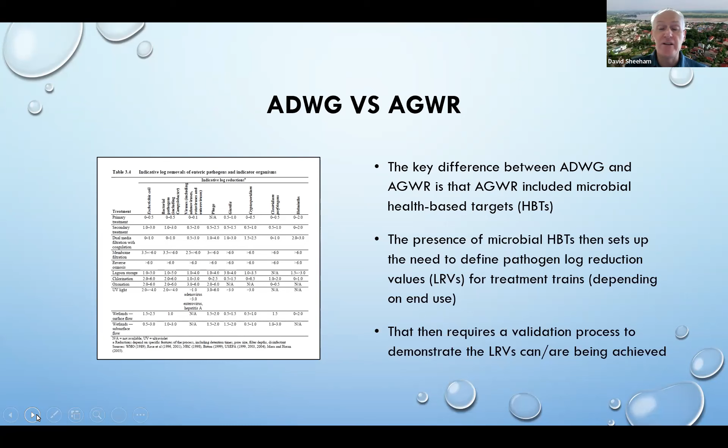And the table on the left-hand side of the screen is taken from the 2006 version of AGWR, and that's one of the tables that's in the process of being updated for current information that's come to light since that point in time. And Chiew, in a later presentation, will give you a great practical example of how you go and apply these guidelines to a real-world scheme.

So as mentioned previously, there is a range of state-based guidance material. This one here shown on the left of the screen is the Victorian Guidelines for Water Recycling. The updated version was released last year.

Unfortunately, each state and territory has a slightly different set of these guidelines and associated regulatory frameworks. And I guess if you're looking at it from a scheme proponent's perspective or a manufacturer of technology, this can lead to certain levels of inefficiency, as validation requirements may also vary from state to state, which means you may have to go through multiple validation processes.

In 2007, we had a change of federal government, and obviously the millennium drought was still going on at that point in time. So at that stage, the Labor Commonwealth government funded a number of water-related centres of excellence. The one relevant to today's discussion was the Australian Water Recycling Centre of Excellence, or the AWRCoE, and that was funded to look at all aspects of water recycling, and that ran from 2009 to 2016. Because it started in 2009, obviously the millennium drought broke in 2010-11, which I guess took a little bit of heat out of the recycled water industry.

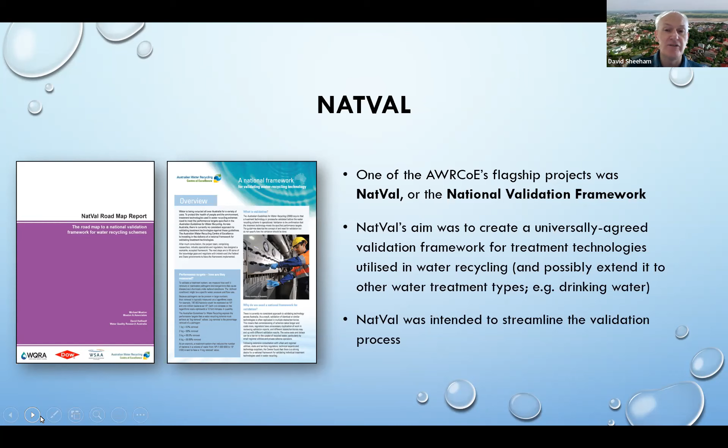But anyway, having said that, one of the flagship programs of the Centre of Excellence was NatVal, or a National Validation Framework. And NatVal's main aim was to create a universally agreed validation framework for treatment technologies utilised in water recycling, and then possibly by extension other water treatment types, including those used in drinking water. And the idea was that if you had that unified, universally agreed framework, that would streamline the validation process across Australia, because really, if you're running a UV system in Queensland, it probably hasn't got a lot of difference if you're running it in Western Australia, for example.

When the Centre of Excellence finished up in 2016, unfortunately, NatVal wasn't quite completed at that point in time. NatVal IP was transferred to an entity known as WaterSecure, and NatVal became what a lot of people would know now as WaterVal.

WaterSecure, in its tenure, managed to finish and publish a number of validation protocols, but for a range of reasons, WaterSecure was wound up in 2018, and the WaterVal IP transferred to WaterRA, and Jacqueline will be covering this in a lot more detail in her presentation. And that's where I'm going to stop, Mark, because I guess a lot of the other presentations will dovetail into that fairly brief introduction to the topic of validation.

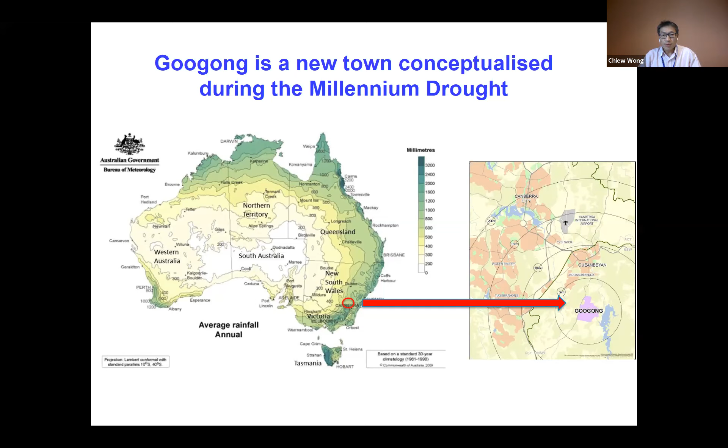Because it's a new town and it was conceived in the millennium drought, water security or resiliency is a very important part of the planning approval. The next slide, I'll talk about the project timeline. The whole project approval was submitted during the millennium drought, in the 2000s, and the planning approval was granted in 2010. There's a couple of timelines; I put it at the high level, just on the yearly level.

Once the project approval was granted, the developer for the parcel of land went about trying to implement the whole project. A key part of the project is to have a water recycling plant that will recycle the wastewater collected in the township, treat it, and then resupply it via a purple pipe around the whole neighborhood. A key part of the strategy is to select a pre-validated membrane supplier or technology supplier as part of the water recycling plant construction. So in 2013, competitive tenders were sent out to select the MBR membrane and the UV technology that will form a key part of the validation for the recycled water scheme. In parallel, the construction contract was tendered, and in late 2013, the whole contract was awarded.

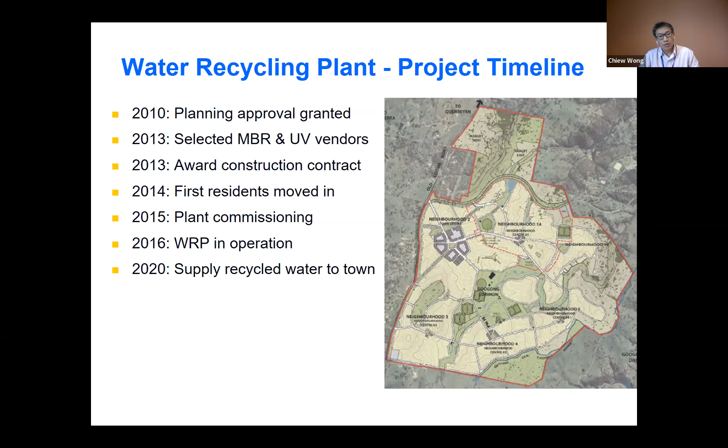Very quickly in 2014, first residents moved into the town. Unfortunately, we can't really commission the plant until there's a certain amount of population. Construction of the plant was completed in 2015, and commissioning was also completed in late 2015. We went through a very extensive 6 month process verification or proving period. So in the middle of 2016, the whole plant went into operation. But it took another 4 years for recycled water to be supplied to the town. There's a number of reasons for that, not necessarily related to validation, but it is a long process that took quite a period of time to implement.

As I mentioned before, Googong is a dual reticulation township. Recycled water is supplied in a purple pipe to each household. I think David mentioned the AGWR. If you go through the AGWR, the pathogen log reduction requirements for a dual reticulation scheme are summarized here: for virus, 6.5 log; protozoa about 5.5 log; bacteria about 5.2 log. For Googong, we employ a multi-barrier approach to achieve these log reduction targets, a combination of MBR, UV, and chlorine to achieve a total log reduction well exceeding the required log reduction.

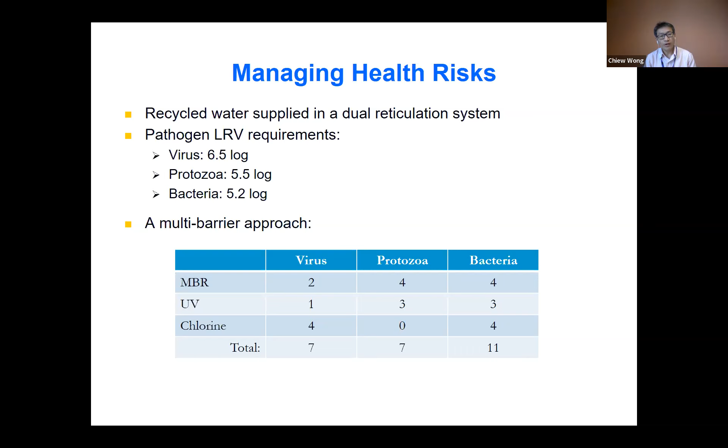Going through each barrier, for MBR we are targeting 2 log, with UV supplying a further 1 log reduction. The chlorine disinfection system was designed to achieve a 4 log reduction of virus. Now, using that similar technology, you find the protozoa and bacteria log reductions will be about 7 and 11, which well exceed the 5.5 or 5.2 logs required for the scheme.

Okay, so as I mentioned before, for the validation approach, we've taken the approach of trying to employ validated products, and the whole idea is we're trying to have validated products that also have online indicators that could continuously monitor the effectiveness of the barrier. A key thing to consider here is really the procurement approach. We know the whole thing will be constructed by a civil contractor, but the key thing is that we want to own the control of the validated technology that will be implemented for the project.

So like I mentioned before, the MBR membrane package was competitively selected, and we evaluated the validation status for the membrane in order to reach the selection. Same for the UV reactor, we evaluated the validation status for the reactor, and then selected the technology before nominating the product to the main contractor for the project. It's worth also noting that we also put in a backup barrier.

As part of the design, we have a tertiary filtration membrane to achieve tertiary phosphorus removal, and that was designed to be a backup barrier because around 2012, 2013, there were some doubts about whether MBR can be considered as a validated technology for water recycling. So we deliberately considered having another membrane just as a backup barrier.

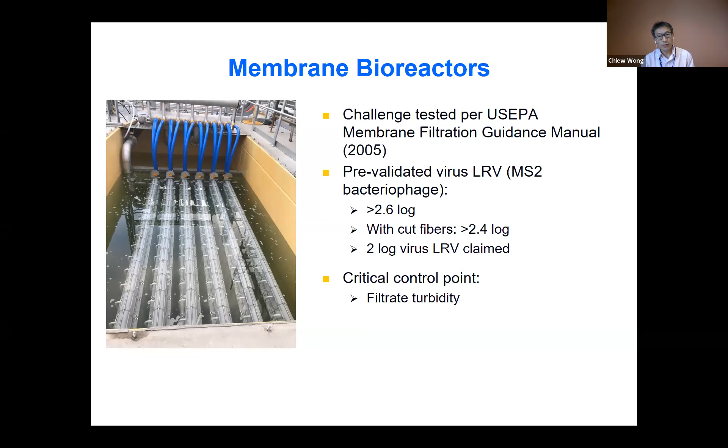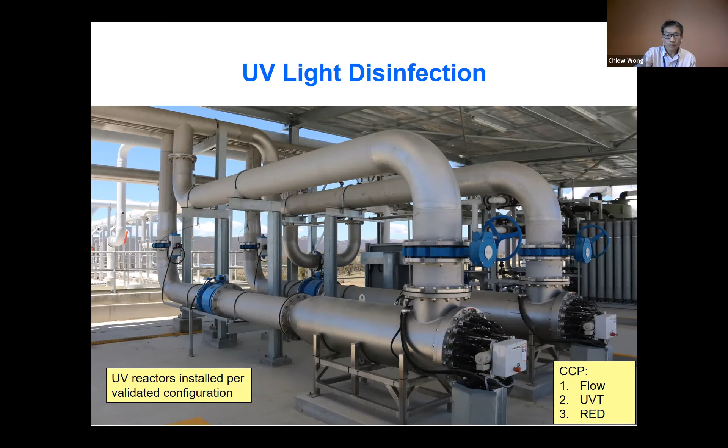So the critical control point for this chlorine disinfection system is trying to achieve a CT value of 16 milligram per minutes per liters, under the condition that the water temperature will be above 10 degrees and the pH is less than 8. Okay. Now, in order to validate the design, a key part of it is to conduct tracer studies.

So the tracer study was conducted by Yabbie Pond. I think Zelko is here today as part of the meeting.

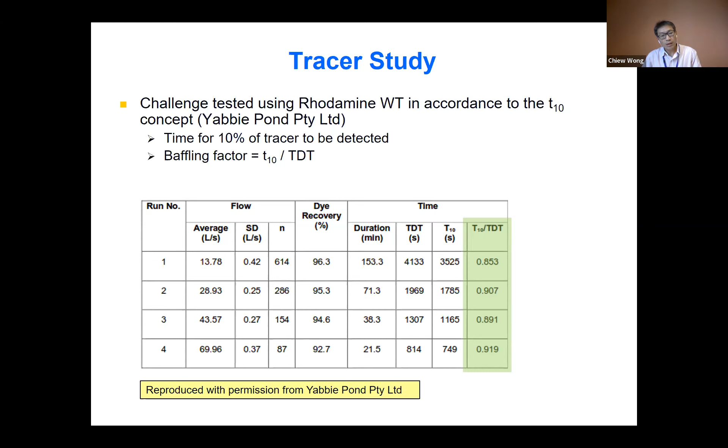And the last column there, which is shaded in green, shows you the efficiency factor that we can achieve with this chlorine contact pipe design. So the numbers range between 85% all the way to about 92%. The next slide. I'll show you a typical response coming out from the tracer studies.

So if you plot it and then estimate the time it takes for 10% of the tracers to come out, in this particular case, you get an efficiency factor of about 0.89. Okay, so all these numbers would then be employed to calculate the CT value in the SCADA program and then form the CCP for the project.

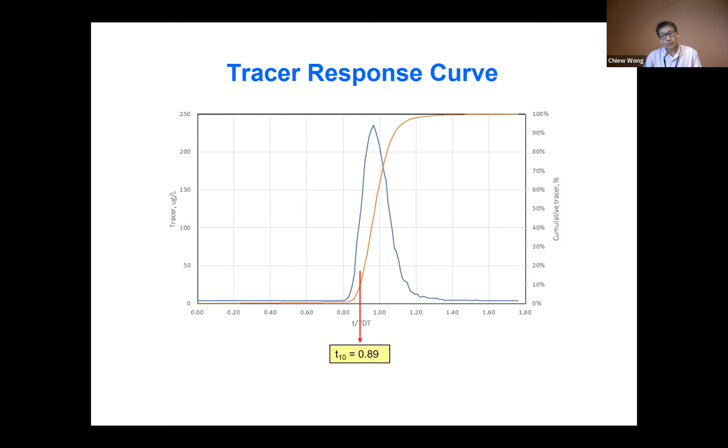So on top of all this validation study, the project also conducted verification testing, and this was conducted during the commissioning and the process proving phase. And this was done in consultation with Office of Water at the time, and it measured a number of indicator organisms at different parts of the process.

So for the MBR, we measure the MBR filtrate, and for the UV, we measure the water after the UV reactor, and then finally for the chlorination system, the recycled water that we measure will demonstrate the level of indicator organisms in the water. So a number of indicator organisms were selected. So for virus it's somatic coliphage, protozoa is Clostridium perfringens, and bacteria is fecal and total coliform.

And basically based on the verification testing, we were not able to detect any of the indicator species in pretty much all the samples. And with that verification testing together with the validation that was conducted, the scheme passed its validation requirement for the project.

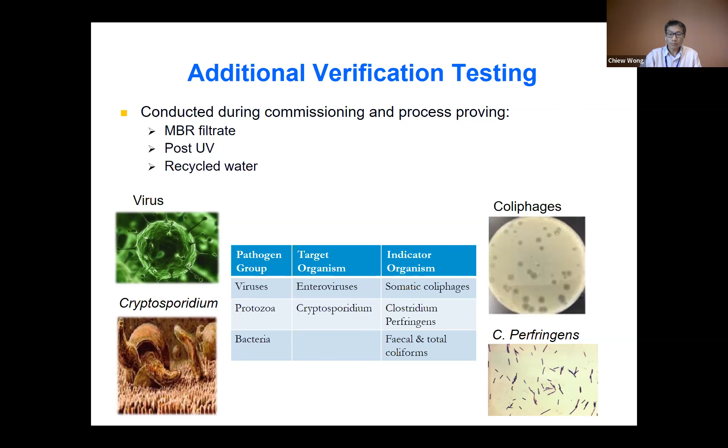So the validation journey was also conducted together with other parts of the recycled water management plan, including a public education program across the town. And also there were a number of cross-connection checks conducted for the households, leading to the recycled water being approved to be supplied to the town in the year 2020.

Now, in terms of outcome, I think what this project demonstrates is that if you can conduct the validations properly for a project like this, it could really improve the resiliency and the livelihood of a new town, which is located inland. Usually for all these inland towns, desalination is really no option. And recycling is a key part of trying to improve the water security and the water resiliency of the town.

So today, Googong is home to about 2,500 people, and ultimately it will be home to some 6,000 people in the next couple of years, up to 10 years.

That's all I have for the presentation. Thank you.

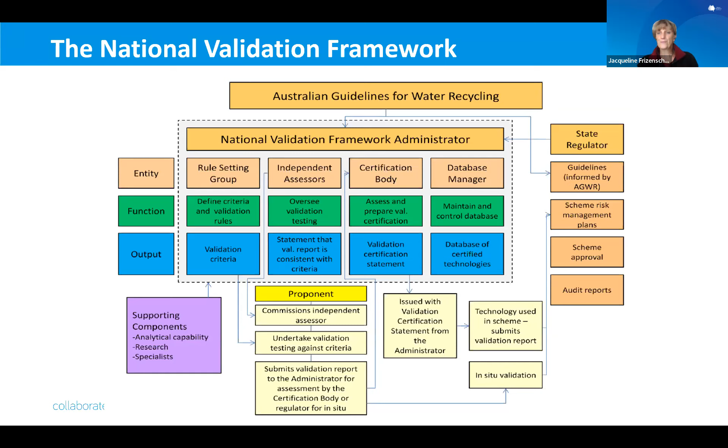So through those workshops and through quite a bit of work, and that was led by Marty Hancock in particular, there has been a new proposed WaterVal option put on the table, which has been endorsed by the regulators and the industry members. And it's a simplified scheme. It still has most of the components of the original scheme embedded.

However, there is now a WaterVal administrator who can coordinate all these groups, but there are now independent assessors and consultants, and the scheme proponents commission consultants to undertake these roles internally and undergo the testing and the validation according to those protocols that are submitted. So it is a bit at arm's length from the national framework, and it is allowing the states to apply some of these protocols as they wish, but there will be standard protocols developed, and the WaterVal administrator will have the oversight of how to do that.

So what does the WaterVal administrator do? His or her role would be to coordinate the rule setting group and the development of the protocols and research, manage the website and resources, and provide training. So it is, in the true sense of the word, an administrator. However, it is also a role that can instigate new research and the identification of which new protocols need to be developed.

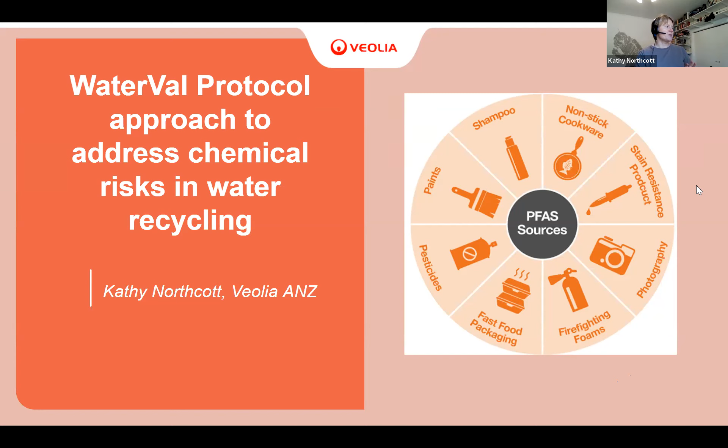I also want to mention that the validation study I'll talk about in my presentation was done by a PhD student at the University of Melbourne, Hong Xiaopeng, who was supervised by Professor Peter Scales. Okay, so we're going to talk about a WaterVal protocol approach to address chemical risks in water recycling. We'll start off with what keeps us awake at night with regards to chemicals of emerging concern. We know that both pathogens and chemicals are critical risks to water quality, public health, and the environment. We know that different classes of pathogens and chemicals can be monitored by routine sampling and analysis, but that is costly and it takes time.

Luckily, we have things like WaterVal and the health-based targets for drinking and recycled water that allow us to categorize pathogen risks into a small number of categories, and then we can place appropriate risk mitigation measures against those particular pathogen categories. You compare that to chemicals, where there's over 85,000 chemicals listed in common use. We only routinely measure about 1,500 typically, and there's tens of millions of chemicals that are currently registered and characterized in less common use, but there's more chemicals being registered every day.

Our typical approach is a multi-barrier treatment system that we can use to reliably remove contaminants, but the challenge for treatment barrier selection is the ability to directly and continuously measure the level of contaminant removal. So for pathogen risks, for many years, I think all of us know and love the critical control point approach. And that's where a treatment barrier is operated within a specified range and validated to claim something called a log removal or an LRV credit. It's been demonstrated in drinking water.

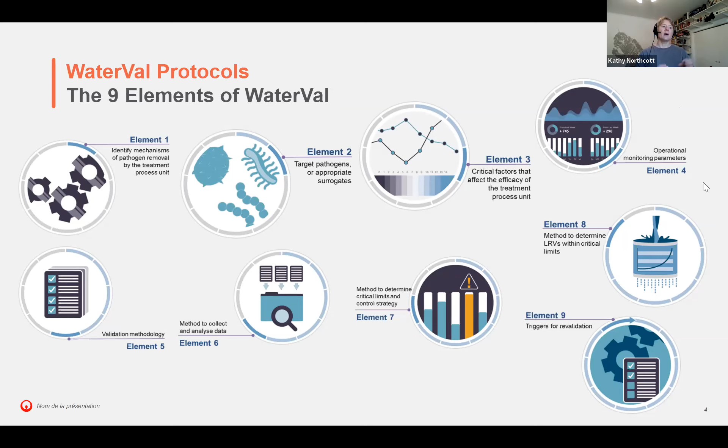You look at your method to determine critical limits and control strategies, you do a method to determine log reduction values within a critical limit, and then you've got your triggers for revalidation of your process. So this chemical risk framework that I'm going to talk about today relies very, very heavily on this concept of the 9 elements of WaterVal.

So we've got these WaterVal protocols. We've got a consistent standardized approach to developing a WaterVal protocol. Fantastic for pathogens, but what are we doing about chemicals? The problem with chemicals, as I've mentioned previously, is there's over 85,000 in common use and tens of millions that are registered on databases and things like that. How do we use a WaterVal approach to manage chemical risks as clearly and consistently as we can for pathogen risks?

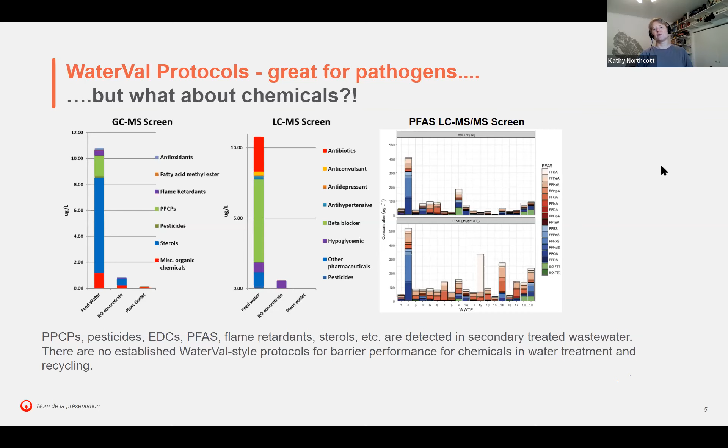So in today's presentation, I'm just going to focus on the first 5 elements of WaterVal. The reason for that is the first 5 elements are the ones that you can more or less apply consistently based on a treatment barrier selection, whereas the following 4 elements tend to be more site or scheme specific. So the first 5 elements are the mechanisms of pathogen removal, target pathogen surrogates, factors that affect efficacy of treatment, operational monitoring parameters, and your validation method.

Now, we did an analysis where we compared the requirements for those WaterVal elements for pathogens against what we would need for this hypothetical chemical protocol using the WaterVal approach. We're using the reverse osmosis example, so we're taking the reverse osmosis nanofiltration WaterVal protocol, but applying it to chemicals this time. What we found was that they're essentially the same mechanisms of removal for both pathogen removal and chemical removal.

The only difference is probably what happens with chemicals with regards to the adsorption diffusion mechanism of removal is a little bit different. In terms of your target compounds or your surrogates, generally for pathogens, what you do is you pick your smallest pathogen. In the case of reverse osmosis, virus is the most difficult to treat, and that's usually your target in terms of establishing your critical limits.

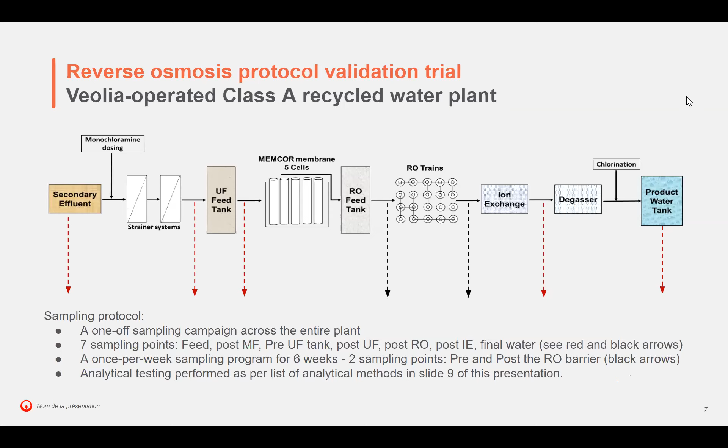What we did was a one-off sampling campaign across this entire Class A water recycling plant. We did 7 sampling points across the entire process, and that has allowed us to establish the chemical profile across that entire process. Then we did a 6-week campaign where we looked at pre and post RO, and we did analytical testing as per a list of analytical methods.

Okay, so I'm going to talk about these first 5 elements of the WaterVal protocol in the context of chemicals, and give you a bit of an overview of our findings for this particular validation trial on this Class A water recycling plant.

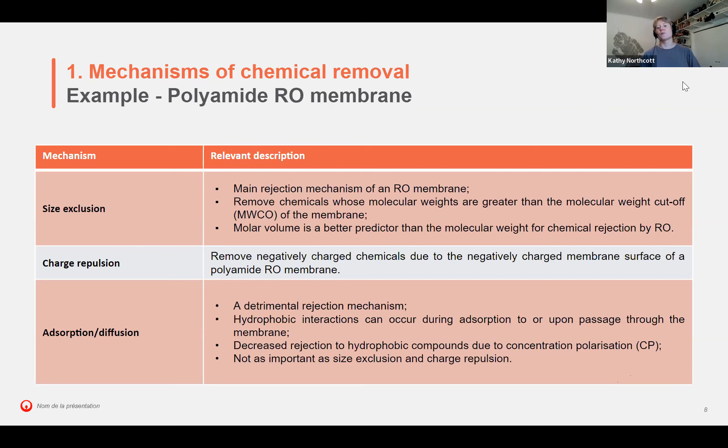So as I mentioned previously, for the mechanisms of chemical removal, we established that the 3 main mechanisms of removal are the same for pathogens as they are for chemicals. So what we found, it was size exclusion, charge repulsion, and the adsorption and diffusion effects on the membrane. The key one being that adsorption has more of a detrimental rejection mechanism. So we actually don't want chemicals to adsorb to the surface of the membrane, because that actually facilitates transfer of chemicals through the membrane.

In terms of element number 3, which are the factors that affect the efficacy of treatment, I mentioned earlier that what we found in the study was that basically the performance parameters that they've established for pathogen removal, we've determined are essentially the same for chemical removal.

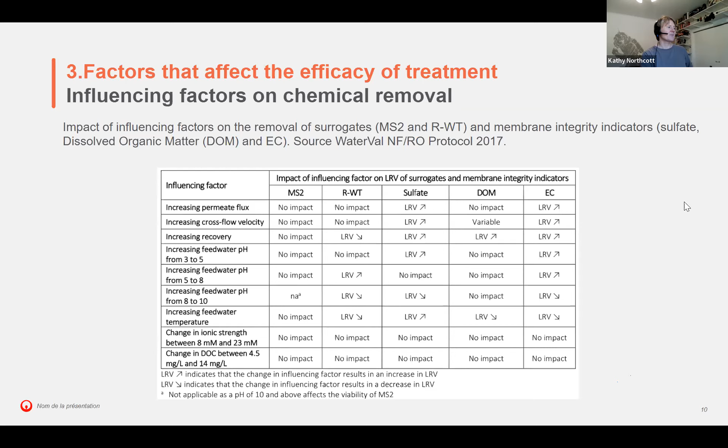So moving on to the 4th element, which is operational monitoring parameters. We tested a number of different operational monitoring parameters in addition to the ones that are on this slide. However, what we did find was that conductivity had a really, really good correlation with chemical removal and a high level of accuracy.

Basically, the level of accuracy of conductivity as a surrogate measure for chemical removal was 95 to 97% of the actual value, which means that we could reliably use conductivity as a continuous online measure to determine our levels of chemical removal across the reverse osmosis membrane.

As a backup, we actually did quite a bit of work around the bioassay, and we established that you can actually use the bioassay as a cheap, quick, reliable, and quite accurate means of doing a broad chemical screen. So actually looking at a broad range of chemicals and chemical classes quite quickly as a backup to that conductivity measurement, to determine whether or not you're getting those chemical removals.

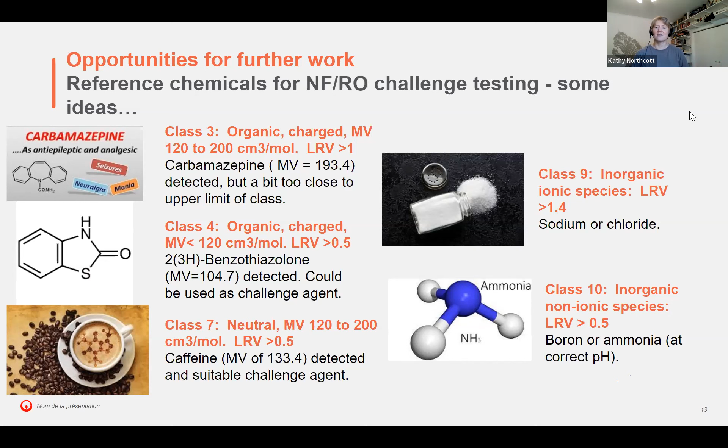So in conclusion, can we actually establish chemical protocols along the lines of the WaterVal pathogen protocols? Yes, we can. We've actually drafted a proposed validation protocol for an ozone barrier. I've just gone through the proposed validation concept for the RO barrier. It's also been looked into to come up with an adsorption protocol, and it's partially developed. There's still more research that's needed to finalize that, but it's some of the way there.

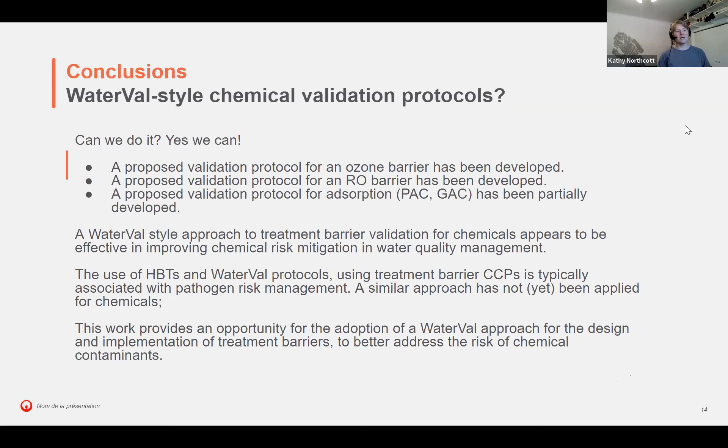It appears to be effective in improving chemical risk mitigation in water quality management. Even though it's typically associated with pathogen risk management, we think that it could be applied to chemicals, even though it hasn't yet been applied to date. And it provides an opportunity for the adoption of this WaterVal approach for the design and implementation of treatment barriers, so that we can better address the risk of chemical contamination.

And just to reiterate that the validation trial work was part of Hongjiao Pang's thesis, and it was supervised by Professor Peter Scales. So thank you very much.

Thank you, Kathy. Excellent presentation, and gives us all a little additional angle to think about from WaterVal.

We didn't get a lot of questions sent through the chat line, but there was one that I was particularly interested in, and I see Jacqueline has answered that. That was from Jamila Hull. Jacqueline, do you want to just go into that in detail for everybody rather than have us read it? The relationship with the regulators, I think, is key to what we're all talking about here.

Yeah, thank you. So I'll put a few bullet points in as an answer, but we realized very early on that this is a key requirement for this. And this was also a key stumbling block initially for it to not get running on the ground, because it was too complex. And then also the state regulators were worried about what implications there would be if there was a nationally endorsed certification scheme. So hence the new kind of framework takes away the pressure a bit.